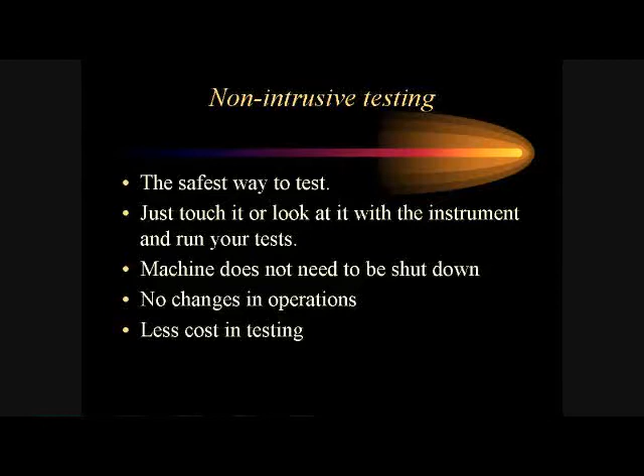Okay, non-intrusive testing is exactly what we're talking about. We don't have to touch it with ultrasound. We don't have to touch it with infrared because we can see it through the camera. It's all non-intrusive. We touch it or look at it with the instrument and record and run our test. We do not shut the machine down.

I usually set a base. I want the machine running under as near a minimum of 40% load as I can get it, because I want to test it in operating mode. I don't want it sitting there idling, because that's not the way it runs when it's operating.

Now, we talked yesterday about some variable speeds. CNC machines, for an example, you can't test those when they're in operation because of the noise of the cutting tools. So we run them empty, but we set every one of them at 1,200 RPMs. That's it. We know every test we run on a CNC machine is run at 1,200 RPMs. So now we have the trend. I can't come in here today and run it at 1200 and then come in tomorrow or next month and run it at 2200. We're not comparing apples to apples. Apples to applesauce, but it's not the same thing. So you can't do that.

So, okay, and also it's safer and there's less cost in non-intrusive testing. I have used ultrasound on every one of these applications. And there's probably not very many people in here - there's some of these you haven't even thought about, I'm sure. But I've used ultrasound on every one of these applications at one point in time or another. And I'm not going to stand here and bore you with going through each one of them. Does anybody have any question about any one of them, about what we done or how we done it? Again, you just let your imagination go crazy. That's what you have to do. You have to think about, how can I make this work? Because if you think about it, you can make it work.

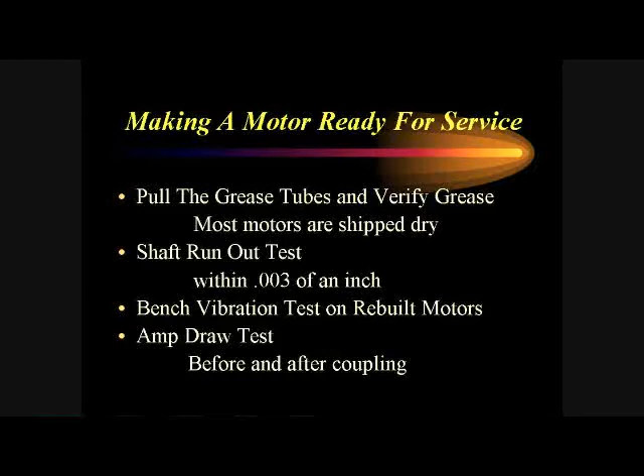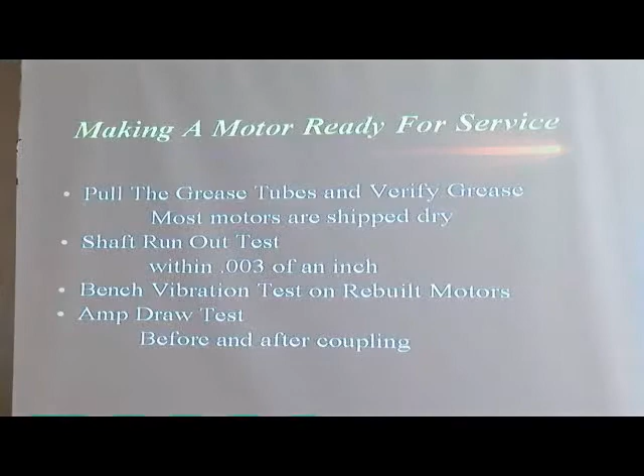Okay? So in order for us to start making some tests, in our application, we require some things of the business, okay? We have to make a motor ready for service. I can tell you right now, 80% of the motors that come out of the shop have dry bearings in them, okay? The first thing we have to do is pull the grease tubes. It's the pipe that runs down in front of the motor, down into the bearing. Invariably, a new motor or rebuilt motor, unless you've made arrangements, that pipe is going to be empty because they do not grease the motors coming out. The reason they don't is because moly-based grease and poly-based grease are not compatible. You mix the two together, they form an acid that will eat the races out of your bearings in 3 to 5 years. Well, they're not going to tell you that. And they don't know what kind of grease you're using, so they don't put anything in there. So now you get your motor, you set it up, hook it up, operating, we're off and running with dry bearings. Before you realize that problem, then we go and grease them, and it's too late.

Now, the book says we give it 2 or 3 strokes every 3 or 4 months. So by the time you get that grease tube full and actually get grease to the bearing at 2 or 3 strokes every 3 or 4 months, you're 3-5 years down the road and your bearings are already shot. Okay, so now I get to sell you a new motor. Built-in job security. It happens.

Okay, we insist on a shaft run-out test. A shaft run-out test, for those that don't understand, what we do is we put a magnetic stand on the motor or down on the base, take a dial indicator and put it on the shaft. Start at the keyway, turn it over real slow till we get to the other side of the keyway. If that dial indicator moves more than 3/1000ths of an inch, I send the motor back. I will not accept that motor.

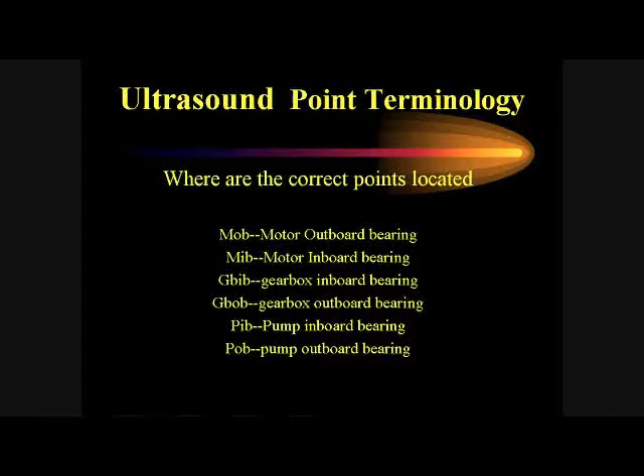And you'll notice on here we have MOB. This is actually what I put in the gun on the route. We have MOB as motor outboard bearing, MIB as motor inboard. It's pretty simple, pretty cut and dried. The gearbox inboard, gearbox outboard, pump inboard, pump outboard.

Okay, how would that look? Well, if I can find it... there it is.

Okay, you can see there the motor. We always start at the fan end of the motor and we go as the power flows. That's the easiest way to remember it. So if I start at the fan end of the motor, which is here, that's the motor outboard bearing. Obviously then this is the motor inboard bearing. Pump inboard bearing, pump outboard bearing.

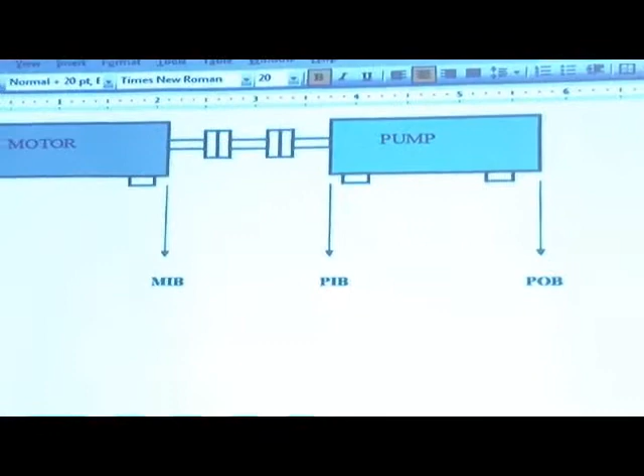On a horizontal pump, your two inboard bearings are going to be together. The two outboard bearings are going to be apart. In, out. It's not that hard. So now any one of you call me and say, I've got a motor inboard bearing that's making some noise, I know exactly which bearing you're talking about. We're not going to lose it in what we can mix up.

So let's look at one then that's - let's look at a gearbox. I'll try to get it up here if I can get... Windows 7 was not my idea, okay?

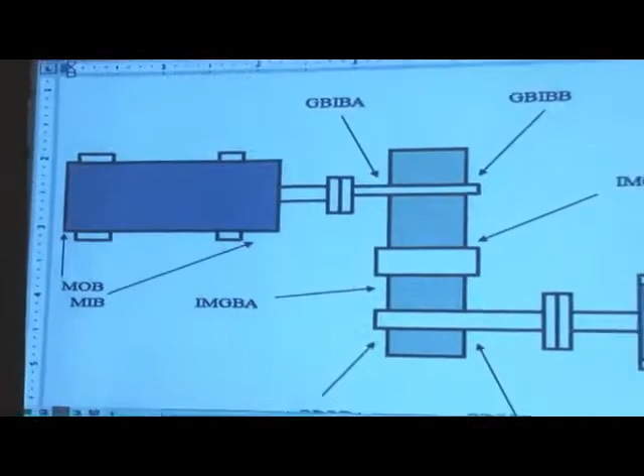Okay, so what we've done here, we've still got the same points that we had: motor out, motor in, pump out. But what we've done is put a gearbox in it, in that line. Now, the inboard side of the gearbox is always the A side. The outboard side of the gearbox is the B side.

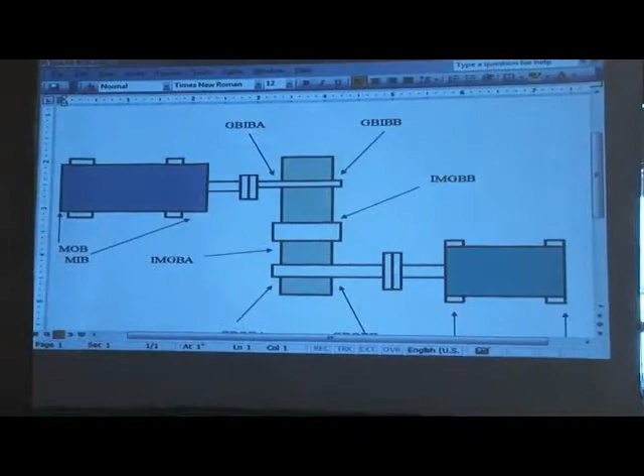So I have a gearbox inboard A, B, and C. Gearbox outboard A, B, and C. Okay, then we go into the machine. It's pretty simple, pretty cut and dried.

When we use - if we can get everybody using the same technology, whether this is the best or not, I don't know. It works the best for me. It works the best for our staff. I have 3 techs out in the field, and when they call me and say, Chuck, CM8 motor inboard bearing is making a lot of noise, I know exactly where he's at because there's no question, and we're going to look at that bearing before we're done.

Okay, if that applies on horizontal pumps, what do we do about a vertical pump? Okay, the vertical pump, everything's down in the ground. And it may be 20 feet down, it may be 5 feet down, it may be 200 feet down.

So what we have there is we have a motor outboard bearing. Remember, we're talking about the fan first as the power flows through the machine. So we have a motor outboard bearing, a motor inboard bearing. The pump, we just have to take a reading with ultrasound on the pump because it's going to tell you one of 2 things. And we're going to listen to that on a vertical pump in a little bit, and I don't want to give it away. So let's take these off.

So now we've got our terminology where we know - if I start talking about a certain bearing or motor or point on a machine, we're all going to know what it is. So now when I make up my route for ultrasound, I'll have CM9 as my heading, with the points underneath it. I can tell you right now, if it's a 2-shaft gearbox, the machine's going to have 8 points. If it's a horizontal pump with no gearbox, a direct shaft coupling, it's 4 points. I know that, so now I can make my route up like that.

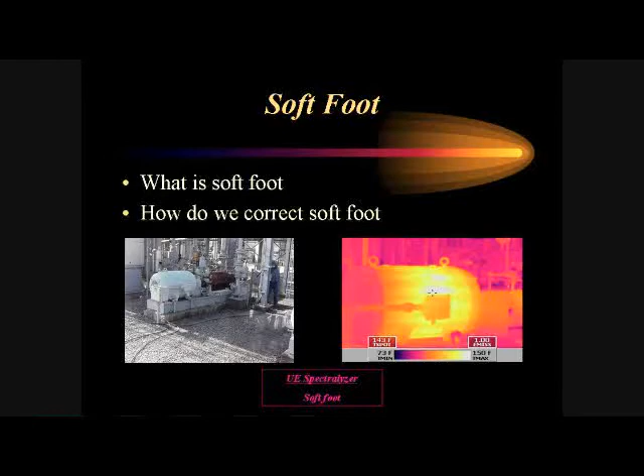See the hot spot on the motor? Right here's the hot spot in the center of the motor. The problem with this is a 300 horsepower motor, $22,000, and they put a twist in the case. The rotor tolerances in the center of that motor are so tight that when they twist the case, it shortens that down and it gets hot in the center. This is not out on our bearings - it's in the motor.

Now, what happened is we found that foot right there on the motor had a 10 thousandths soft foot. When we loosened that bolt, the motor came up 10 thousandths on that foot. So actually what they'd done was bolt 3 down, then bolt that one down - they forced a 10 thousandths twist. 10 thousandths is not very much at all. I have some business cards laid up here - I had these mic'd, these are 6 thousandths of an inch thick. So now you can kind of imagine what 10 thousandths is. It's not very much. But what happens?

What happens when we have a 10 thousandth soft foot? Where you at, Chuck?

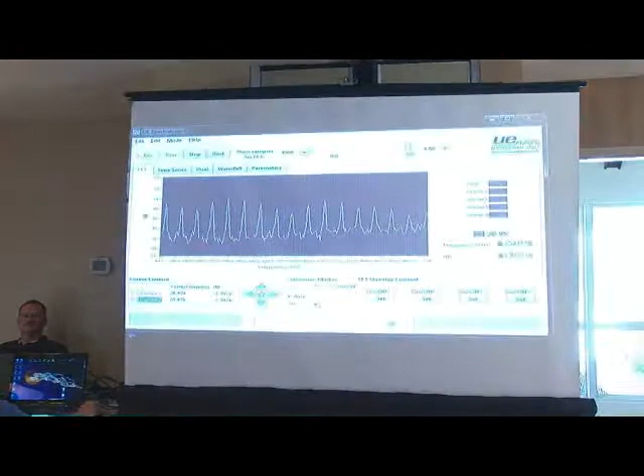Okay, what we're going to play is that soft foot. I want you to listen for the surge - you're going to hear the surge. Okay, are we ready? Here we go.

You hear that in there? That is that rotor working through a twist. Also, if we look, we have our 60 cycles in here - that's electricity, 60 cycles. It's electricity, it's just that simple.

At what point are you testing or using the UE where I can get that sound? To get this, right there on the motor inboard bearing. Can you repeat the question so they can hear? He asked me at what point was I checking the motor with the ultrasound gun - I had it placed on the motor inboard bearing, right above that foot.

Was it before the infrared or after the infrared? The infrared is how I actually found the soft foot. What was the RPM or turning speed on the motor? That one turns 1735, 1750. That would be a 2 times right there, which will also indicate soft foot.

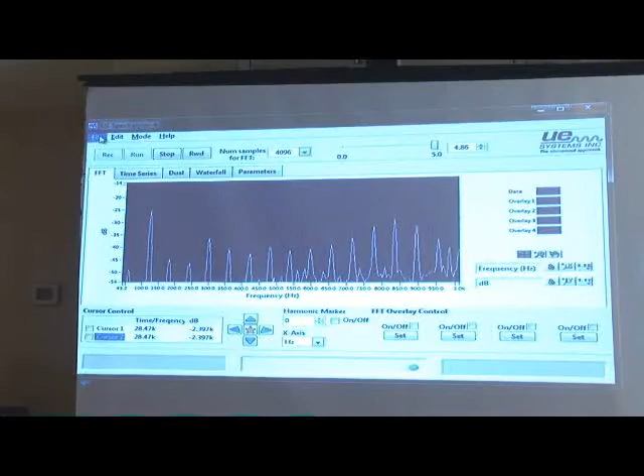We're going to open the wave. I got to stop it. Spectralyzer was not my idea either, guys.

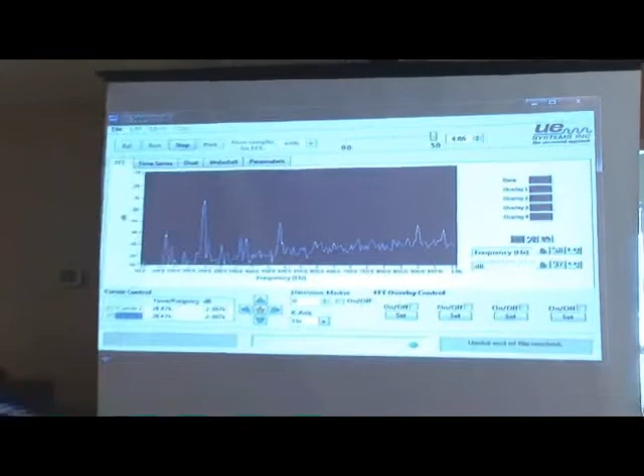Okay, so now we're going to correct the soft foot. Listen to the difference in the sound. The surge is gone, okay? That was a matter of about 20 minutes. We found that. We started checking the feet and found 10 thousandths. We put 10 thousandths under it, bolted it back down, and that's the sound we got now. So soft foot, very, very important. That should always be checked.

Always check. Yes, if I can find it. Stop. The first one.

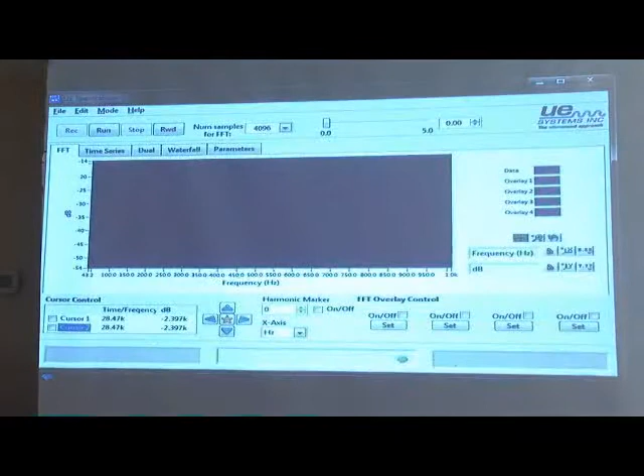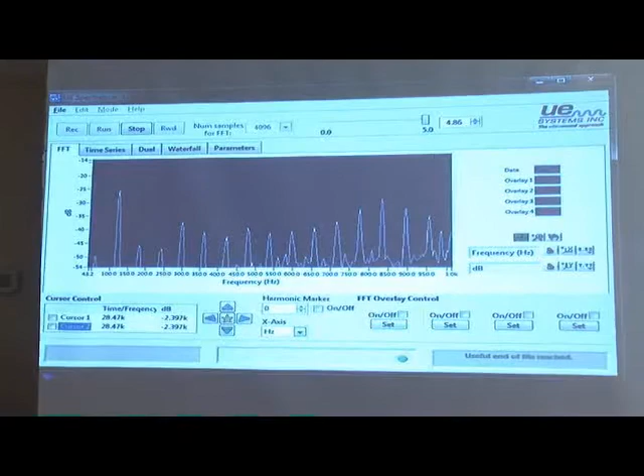Hear the surge in there? If you would have listened to the outboard, would you have seen it? I think you might have. I didn't, but I think probably you would, because that's going to be throughout the motor, since it's coming off of the rotor. You look at the amplitude, it's in harmonics. When you look at the one after you fix the soft foot, it's not in harmonics. It's gone, the soft foot's gone. So it's turning, you're getting into the 60 cycles. What we're getting into is the electricity of the rotor rubbing on the outside of the case. Okay, so let's move away from this one.

One more question. Is there any specific frequency you can refer to detect this soft foot? What frequency do you have? Oh, frequency? Yeah, it's 20. I test all my contact bearings at 25 thousandths. So that's where I was at on there. It was 25 thousandths. 25 hertz. Kilohertz. 25,000 hertz. That's where I got 25,000. Okay, let's move to the next one.

If I can find it. See, all this technology, and I got stuff laying everywhere, and I lose about half of it. So I got to get back on that screen.

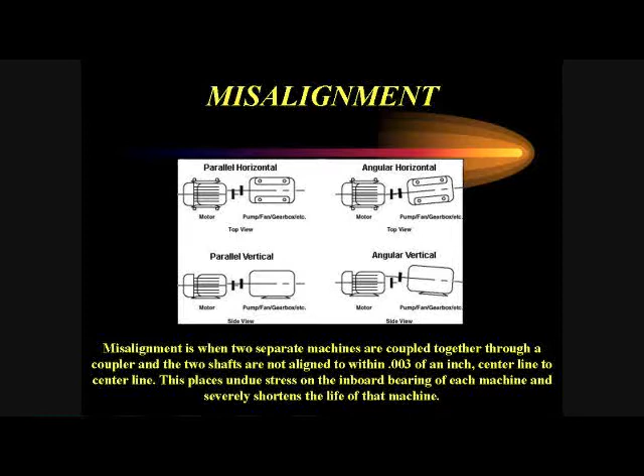Here's misalignment. You see what's happening here, and a lot of people don't understand it and don't realize how important it is until we see something like this. These machines are not going to last very long. Because how many of you have tried to open a gate when the hinge is crooked? The gate's hard to open because it's bent. That's what we're doing with the motor. We're trying to open that gate, but we're doing it at 1700 RPMs.

And then we wonder why it shakes. Okay? Misalignment. Very, very important.

This is the old way to realign them. It's called reverse dial alignment. The bottom one is tied to this shaft, and it's got a dial indicator on the other shaft. The top one is tied to this shaft and has a dial indicator on the other. So when you roll it over, it's measuring this. You want those to be at 0.

This is the cheapest way of going. It's not as fast as lasers. Lasers are a lot better. I do everything now with lasers. We'll have some examples of that here in just a little bit.

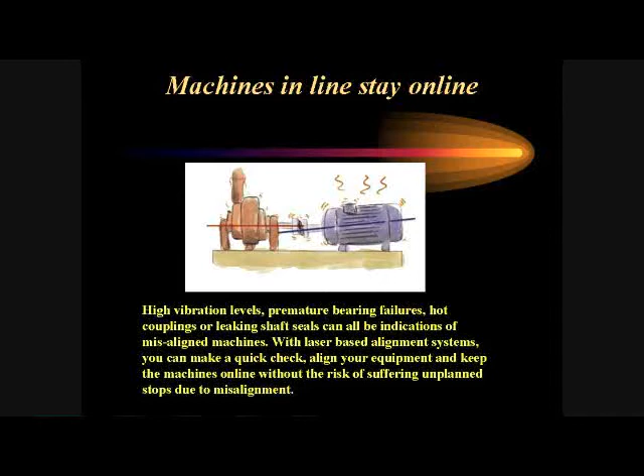Okay, here we go again. High vibration levels. Now, let's think about this. Ultrasound tells me my 2 inboard bearings are louder than my 2 outboard. Infrared tells me my 2 inboard bearings are hotter than my 2 outboard bearings. I put my hand on the motor, and it feels like a vibrator. I got 3 things telling me here that this thing's misaligned.

At some point in time, we need to make a decision to fix the machine, or the machine's going to make a decision. And they don't have any conscience. They don't care. I guarantee you it's going to go down at 2 o'clock in the morning when there's no staff here. We got to call all the staff back. 4 inches of snow on the ground and 50-mile-an-hour winds, except in Brazil. They don't have that. Okay?

But you understand what I'm saying. Nobody ever lost a motor when they didn't need it. If you don't need it, it ain't running. So we always lose them when we're working them the most, pushing them the hardest because of production. That's when logically, that's when they're going to fail.

So now what we have is we're hurrying. We're taking shortcuts. We're trying to get back up and running because we're losing production, and management's out here on your backside trying to get you going. And now it becomes unsafe. Now we start to lose fingers because we're not doing things the right way. We're taking shortcuts. We don't do near as good a job of alignment because we're in too big a hurry to get it back to running.

I say we take the time. Let's do it right to start with. Then we don't have to double the time because we're going to end up doing it again.

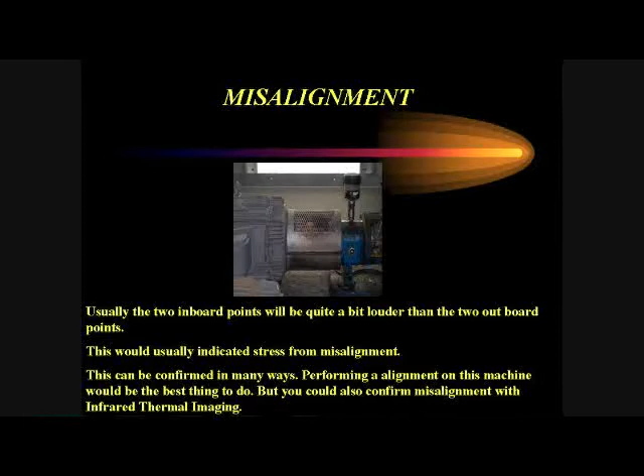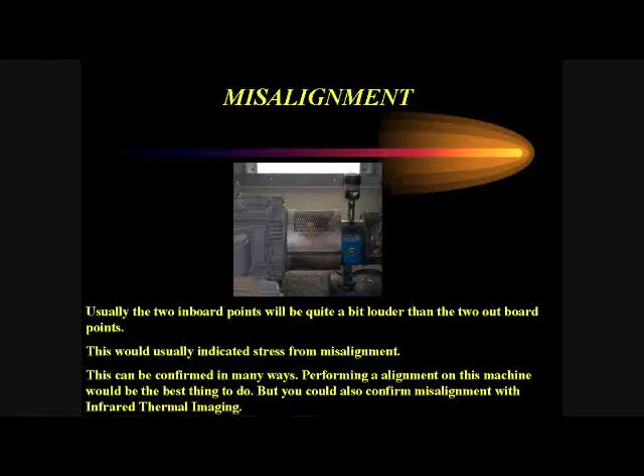I have a couple examples of this, so we'll look at another one here right quick.

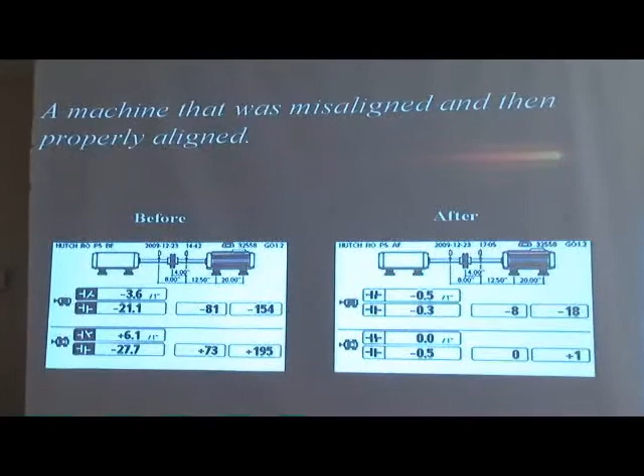So when we got done aligning it, this is the way it's set. That 5/10 is 5/10 of 1,000th. That's how close you can bring them. I literally could take a glass of water and set it up on top of that motor, and you don't even see a ripple in the water when it's running. You have to put your hand down there to see if there's air blowing to even know it's running. They run that quiet when they're aligned right.

Okay, let's look at another one.

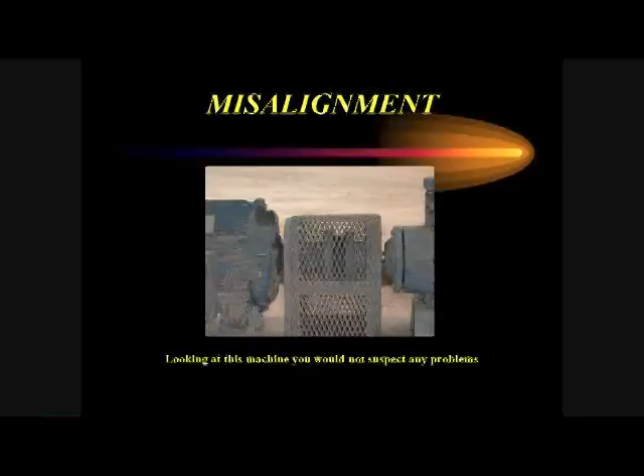This one here is a Martin-style coupler. We've all seen the Martin-style couplers. It's the coupler that goes together, and it's got the rubber in the center of it that looks like a gear. And that's what makes it turn, okay?

So this coupler was so far out of alignment - we've all taken a piece of wire before and bent it until it broke and it got hot. That's what's happening here. These two hubs are doing this, so far out of alignment the motor's about to jump off of the base. So again, the two inboard bearings were louder than the two outboard.

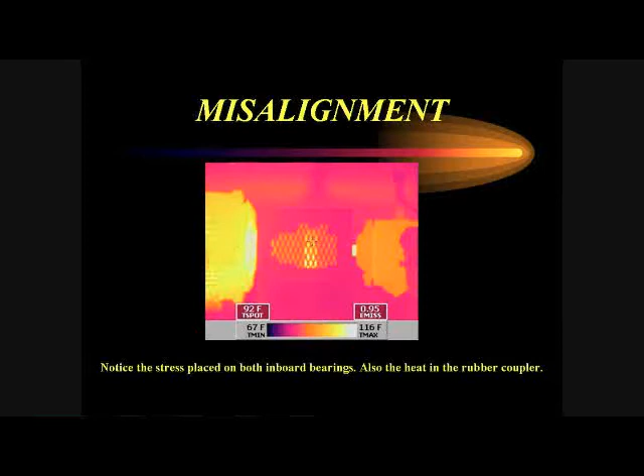So we look at it with infrared, and it's pretty obvious. Look at that coupler. There's no reason for that piece of rubber in the center of that to be hot other than misalignment. That's all it can be. There's nothing there to heat that rubber up. But you can see the bearings on the pump and the bearing on the motor are both hot. Classic case of misalignment again.

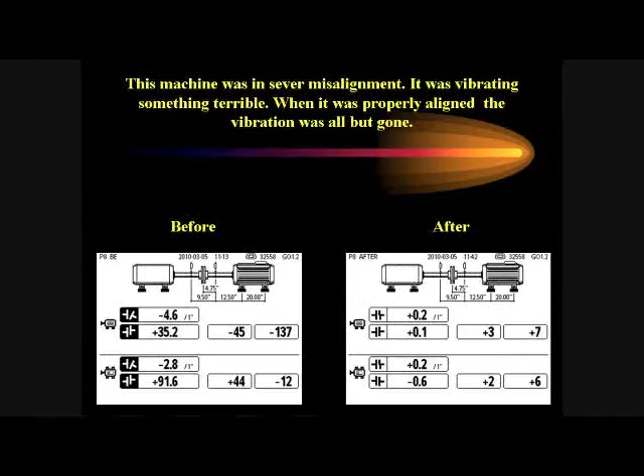So we realigned this one, and here's where we go. It was 91 thousandths out. See the difference in how it came back in once we put the lasers on it. You put the lasers on it, it's about a 45-minute job to align it and get it right.

Now, 45 minutes to get it right and make it run 10 years, or don't take 45 minutes and get it wrong and have it run 18 months. Doesn't take a rocket scientist for me to figure that one out. If I can keep from doing it every 18 months and do it once every 10 years, that's the way I want to go. I'm lazy by nature.

So misalignment is very, very important. It's things that we have to really think about, and we're using our technology to find those problems. Didn't used to be that way. Used to be you put your hand on it and say, it's not bad, or you put your hand on the pump, it ain't bad. That human thermometer thing's not a good deal.

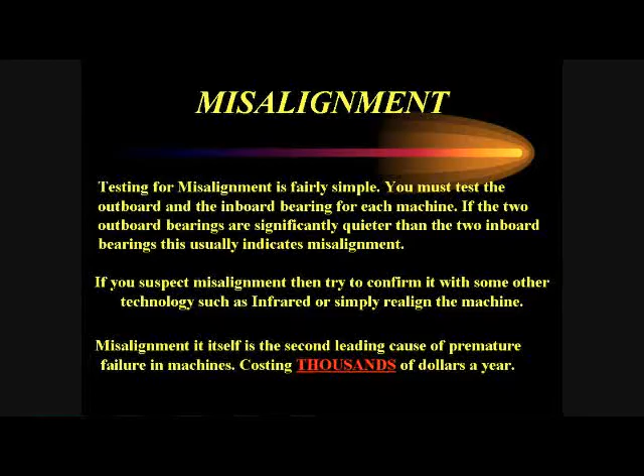It's not a good deal because, again, now we're breaking that plane. And sometimes you put a hand in there and you pull part of a hand back. That's not a good deal. We don't want to go there. So misalignment, we have to pay a lot of attention to that.

Okay, here's a simple question. If misalignment is the number 2 cause of premature motor failure, what is number 1? Lubrication - close. Improper lubrication.

How much grease is enough? How often do we grease? The book says we give it 2 or 3 squirts every 3 months.

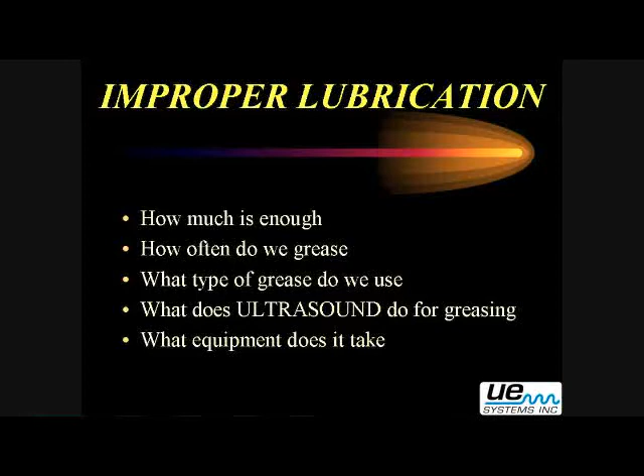Well, what I'm saying here is Mark is a motor and he runs 24/7. Bennett's a motor right here and he's kind of lazy, he only works 2 hours a week. We're going to grease them both the same? It's not even logical. It doesn't make sense.

We're going to undergrease this machine, and this one's going to be deadly overgreased if we do what the book says. So I say throw the book away. Get rid of it, we don't need it. Start using ultrasound. Use the equipment we have to do it. I grease bearings with ultrasound totally.

And a lot of our clients, they do not grease motors. My staff does it. We have taken over their grease program completely, because there are some things that we require. We talked about it on the motors a while ago. How often do we grease?

What type of grease do we use? How many of you are using all-purpose grease in your plants? Boy, am I glad to see that. You know what? All-purpose grease, Mystic JT6, that red stringy stuff, that's made for a plow out on the farm.

We need to be in a Polyrex SHC 100, something like that, that's a high-speed grease, a high-temperature grease that's made for electric motors. We can't use the same thing that we use out on the farm and just pump grease in it till it oozes out, because that's what we used to do, and we've been raised to do that.

When we do that, all we're doing is pumping the dirt out of the bearing. We're not re-lubricating it - it's got enough lubrication in it. But if we pump grease till it oozes out, then we're forcing the dirt out of the bearing. That's all we're doing. We've over-lubricated it.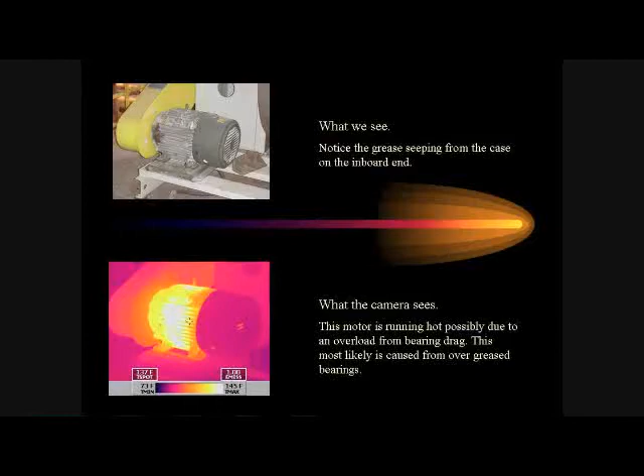So let's move to a bearing then. What happens here? If you look at this motor, right there, you see grease coming out of it, right here. The problem with that is it's been overgreased.

What happens when we overgrease a motor? We have any electricians in here? Good, then I'm not going to get in an argument.

Contrary to popular belief, electricity doesn't go through the wire. It goes around the wire, around the outside of it. That's how we measure how much current is going, because we put an amp probe around the wire and measure the magnetic field. The bigger the wire, the more surface area you have, the more current you can run through it, and it stays cool. The smaller the wire, the less current.

Also, contrary to popular belief, insulation is not to keep you from getting shocked. It's put on there to direct the flow of current, to make sure it's going the right direction.

So now, if we overgrease our motors, what happens is the grease builds a tunnel. It starts working to the outside. As the balls are going around, it builds a tunnel in that bearing. So now the balls in that bearing are running in this tunnel.

It can't dissipate the heat. It can't get it out of there. It becomes an insulator. So pretty soon it gets hot enough to melt the base down of your grease, and then your oil starts to sling to the outside, and we start to get leaks around our motors.

And everybody here's got one of these. And if you don't, if you say you don't, we'll go find you one. Because everybody does this.

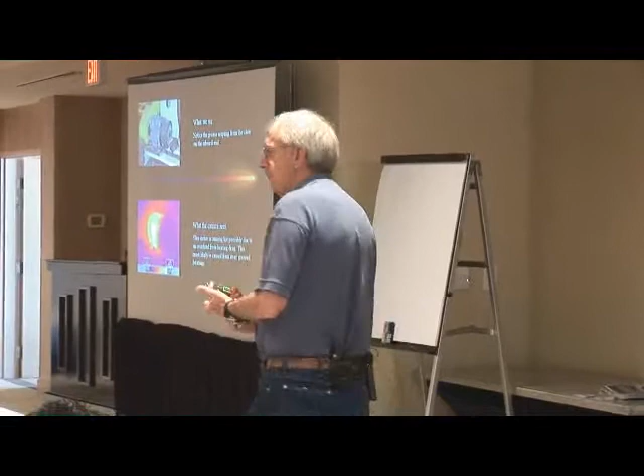So now that it's hot, it's starting to lose power. We're losing RPMs. It's not carrying the load it did. What's the first thing we do? Pump some more grease in it.

Invariably, that's what happens. The first thing, oh, it's getting hot, let's grease it. Well, the reason it's getting hot is because it can't get any air. I asked the guy, I said, how much grease do you put in it?

He said, well, it's a 25 horsepower motor. I said, okay, how much grease do you put in it? He said, I told you it's a 25 horsepower motor.

We all got these. Same scenario. It's leaking out. It's coming around the end bell. It's being slung to the outside, centrifugal force.

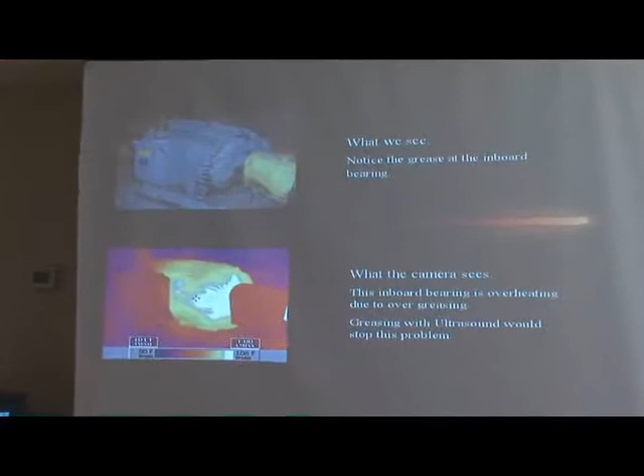25 horsepower motor, how much grease do you put in it? He said, well, it's a 25 horsepower motor. I said, so what? He said, you don't understand. 25 horsepower, you put 25 strokes in it.

What do you do with a 600 horsepower motor? Pump a 55-gallon drum in there? Now, y'all think I'm kidding you.

Here's that 25 horsepower motor. Look at that. That's unreasonable. Look at the grease. No wonder the motor's getting hot. This happens every day.

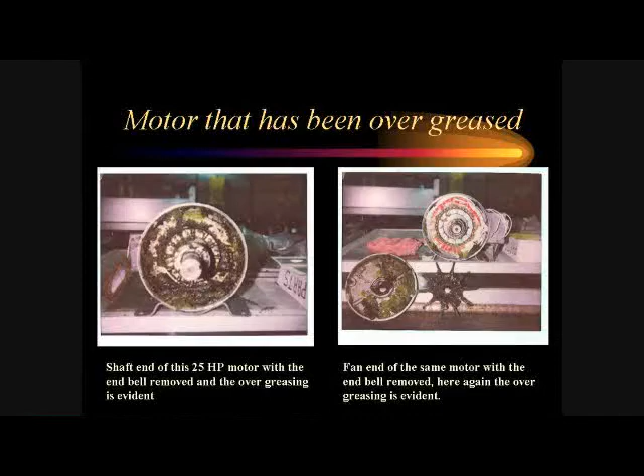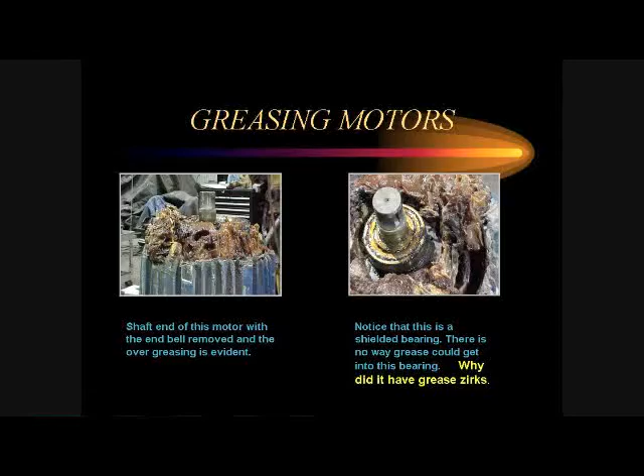Every day. I found this one in Wichita, Kansas, about 40 miles from where I live. Look at this. Oh man, I'm telling you what. After about the 8th tube of grease, the light should have come on. Where's this stuff going, you know?

Number one, this guy would not be working for me anymore. If you ain't smart enough to figure out 6 or 8 tubes of grease is enough in this motor, then I don't want you working here.

The other thing, notice the bearing. Look at that bearing. It's a shielded bearing. You couldn't get grease in it if you wanted to. So why does it have grease zerks in it?

Well, the maintenance man in his infinite wisdom goes out and looks at the motor, hears it rattling a little bit and says, boy, that needs some grease. So he pulled the plug out and put a grease zerk in it so he could put grease in his motor. So they pump grease and they pump grease and they pump grease, and it never quieted down, and they keep pumping grease till finally it's messed up. It's gone.

In my clients, I will not have a motor with shielded bearings in it. The reason for shielded bearings is to keep you from overgreasing, because that's what happens. Now, in my situation where I have to have the plant running 24/7, I want to be able to, at least if I find a bad one, I'll put some grease in it and I'll baby it along until I can get to a scheduled shutdown.

If it's got shielded bearings in it, I'm at the mercy of that bearing. There's nothing I can do. I just have to hope it lasts until we can get to a shutdown. So I will not have shielded bearings in any of my motors. The first clue of a shielded bearing is they pull the grease zerk out and put a pipe plug in there. If I get one back like that, it goes back to the factory. I don't want it. We're not going to have it in my plant. And that's very, very important, especially when you're in charge of greasing all the motors.

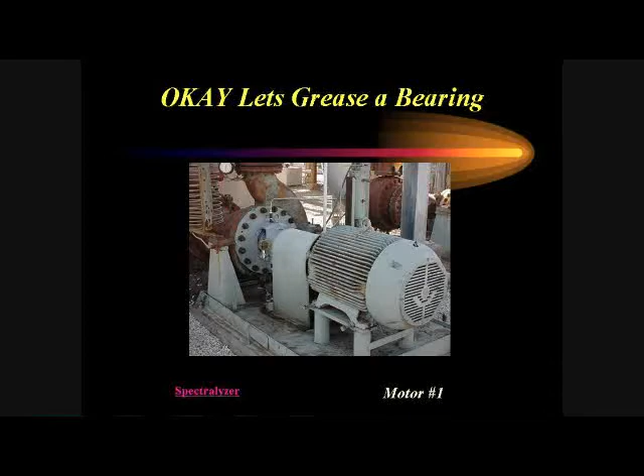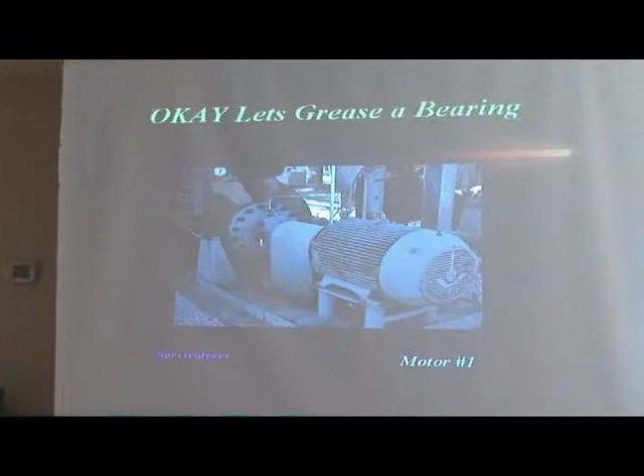I've got plants that have 500 motors in them, and we grease those motors, but only when we need to. We throw the book away. We're not going to grease every three months just because it says to. So let's grease a motor. This is a 200 horsepower motor that's been sitting on this stand for probably 15 years. It's a deethanizer bottoms pump. This pump pumps 1,500 pounds of pressure, and it's boiling propane. What happens is it pumps...

Yes? She has a question. The microphone? Oh, here, I got it. There we go.

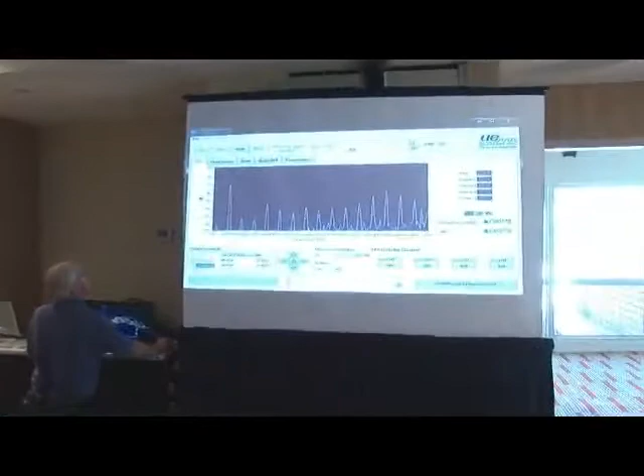Very good question. So let's grease this motor. What we're going to do is I'm going to pull this back over onto the screen. We'll go to File. I better go to Stop. Hey. Hey, Gary, you see what's going on here, don't you? Okay.

Okay, we're going to grease that. We're going to listen to the motor first. And when we listen to this motor, a good bearing should sound like air escaping. That's the way it should sound. It shouldn't sound like popcorn, it shouldn't sound like marbles in a bucket. So let's listen to this bearing.

Okay, you can hear the crackle in there. That motor needs greased. When you hear that crackle, it's dry. What's actually happening is you're hearing the grease that's in there separate, that's what's making the pops. So let's grease this motor. We're going to listen to it. As we grease it, listen for the change. Listen for the change, that's the main thing. Okay, so let's stop.

It takes an old dog a while, but he'll learn the trick after a while.

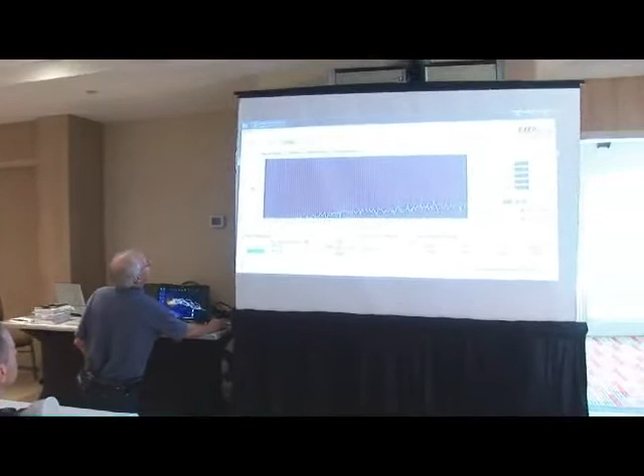So what you're saying is this - I think further to what Hugo is asking - an over-greased bearing can be misinterpreted as a good bearing. Yes, it can. But you have to use the other thing, like a doctor, you actually look for the symptoms, and if the symptoms does not seem to point towards it, then it's not. That's right. Thank you. Okay, it's just an indicator.

Mike. Another thing on the over-lubrication, and I'm sure a lot of our UE guys can talk about this, is that a lot of times you'll hear an over-lubricated bearing and it just sounds a lot like cavitation, with that popping sound. So what you can also do is grease that bearing, and if that total quality doesn't change, your decibels don't change, it doesn't see that drop, that's another indication to say that bearing is already over-greased. So there's your other indication along with it.

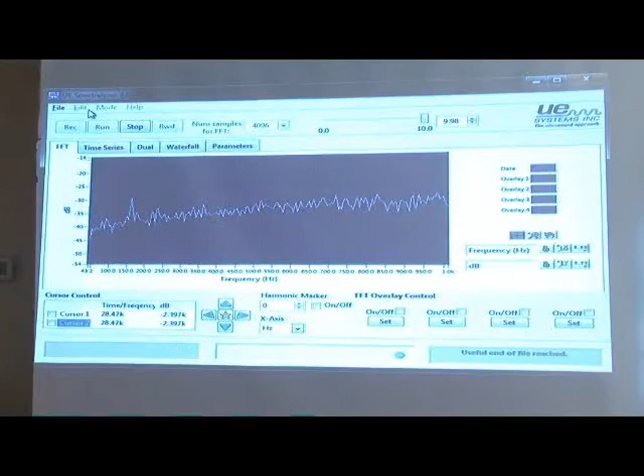That's on a 600 horsepower motor. It's CM8. It actually is on a gearbox that runs a compressor that turns 13,800 RPMs, so it's a very, very important motor. So we greased it. Now when we grease this one, I want you to listen to the end because my tech didn't do a real good job of recording and catching it at the right time. But listen to the end, okay?

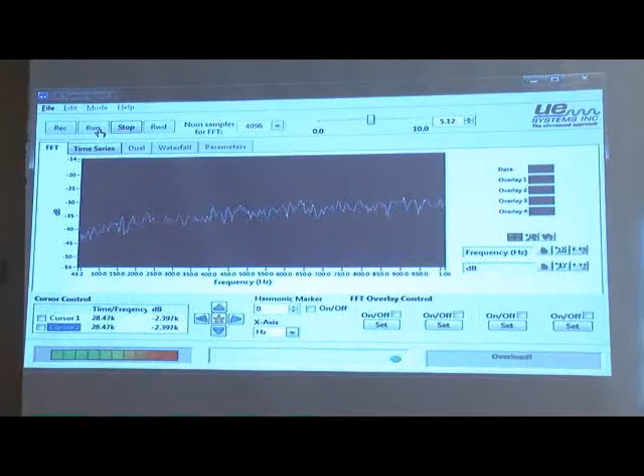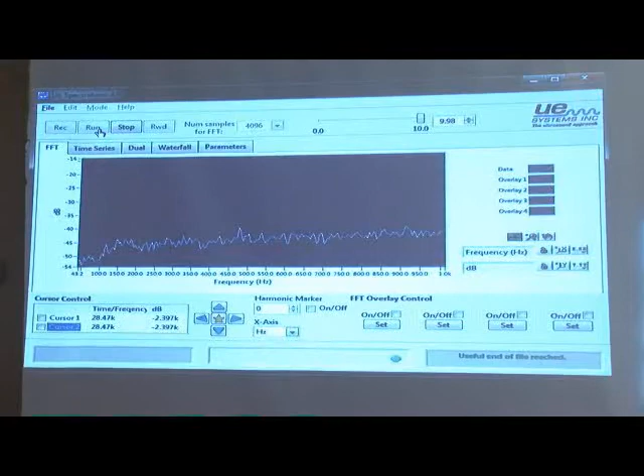Okay, right at the end we could hear it dropping down, hear it getting quieter. But did you hear the crackle that's still in it? What we determined there, we went ahead and took this machine down. What we determined there, it had not been greased in so long that the grease had dried out. So when we pump grease in there, we were getting good grease in, and then every once in a while we'd get some dirty grease or some dried grease, and it would crackle in the bearing until we finally pumped through and got it all sounding clean. So you can even tell from there that you're getting good grease to it or not by listening to what it says, okay? So, yes, another question.

Go right ahead, I can hear you.

So they don't have infrared, just ultrasound. If you listen to it, the bearing's crackling. They pump a little grease into it, and if it doesn't smooth out, write it up, get it changed. That's simple, it's just a bad bearing.

Now we can look at the bad bearing, we'll do that here in just a little bit. We'll show you. Okay, so we've greased this motor. Let me find my stuff.

I'm going to pop this up. This is the second motor we listened to, a 600 horsepower motor. This is what a motor should look like in infrared.

Look at the center of the motor, it has a band on it. You see the band right here on that motor? It's warmer right there. Anytime a bearing on either end of the motor, inboard or outboard, is hotter than the center of the motor, we have a bearing problem.

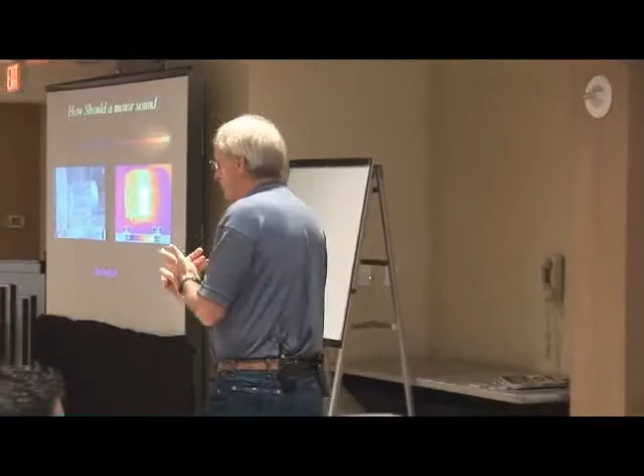So there's no reason for them to be hotter than the center of that operational part of the motor, unless there's a problem. That problem may be a dry bearing, may be misalignment, or we may have the belts too tight and pulled over into the race on that backside. We don't know what the problem is, but we know we have a problem. So now we start watching this, and if we see heat building up in the bearings, we need to take care of it.

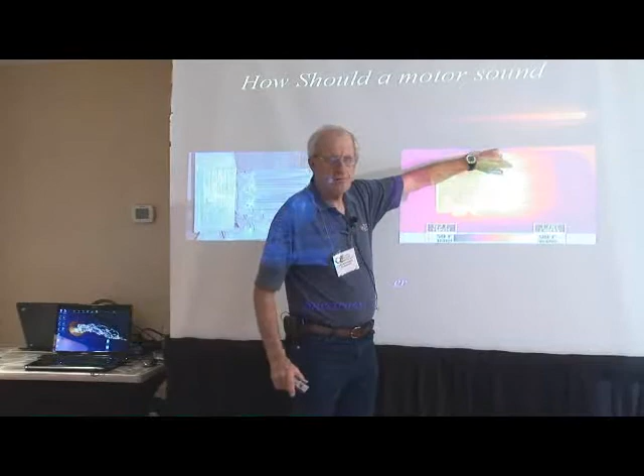Yes? On this motor that's warmer in the center, earlier the motor we looked at had a hot spot in the center -- misaligned. How do you determine the difference? The soft foot will be a spot, this is more a band, the whole thing here. You'll have a spot where it's rubbing, but this is the band -- this is the tolerances in the motor. And this motor runs 24/7 also, so it builds heat in it.

Okay, let's move on, this is real quick, I want to go through this. The bearing that we're going to look at is a bad bearing, a known bad bearing. This stuff is available to you. Gary and I worked this out, and it's a very simple thing to figure out what's wrong with your bearing or how your bearing is failing.

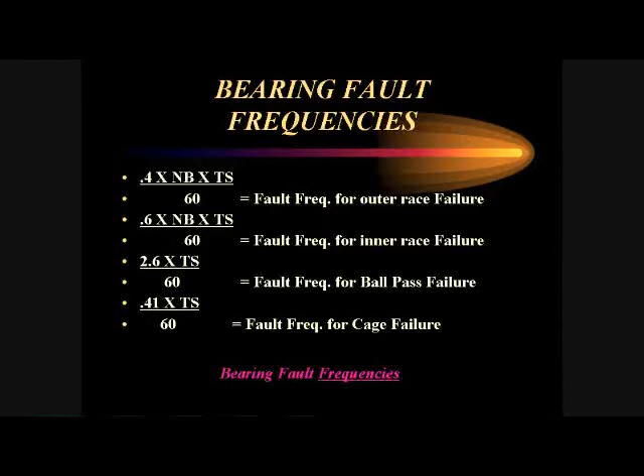If we look at the top one, we can see that if we take 0.4 times the number of balls in the bearing times the turning speed, then divide by 60, whatever that number is will be the fault frequency on Spectralyzer for the outer race failure. So now we're beginning to see that we can tell what part of the bearing is failing by using this. Okay, so let's listen to a bad bearing right quick.

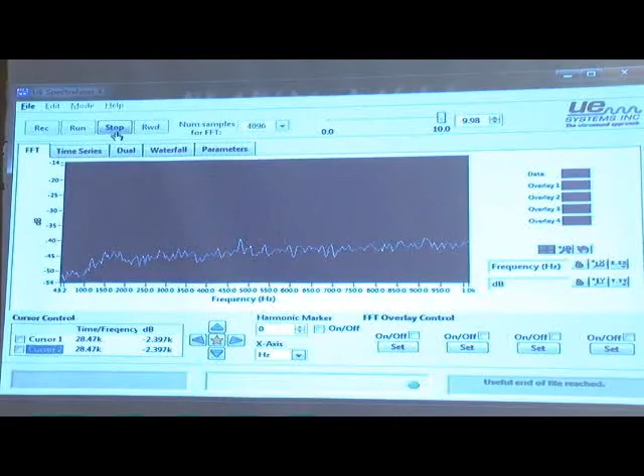Gary, we got to change this. Okay, here's a bad bearing, this is a known bad bearing.

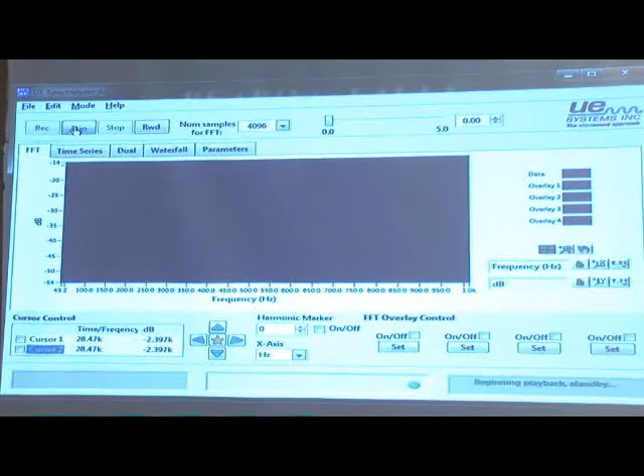You hear the tonal sound in that bearing? A bassy sound -- certainly doesn't sound like air escaping. What that bassy sound is, is that ball coming around hitting that pit. It's doing it 1,700 times a minute, so you can't hear between them, that's why it sounds like a hum.

So if we take this -- and this one here I'll take credit for -- we want to put a harmonic cursor on there and find what it is. Used to be, how many of you are using Spectralyzer 4 now? Everybody should get it, it's free, it's on the website, it's simple to use. And there's many things it will tell you.

This one is awesome because I can go right here with my cursor, hit the shift key, and that gives me the fault frequency that I have in this bearing. You see the harmonics going across there? This one happens to hit right on 91. Now if I'm not exactly where I need to be, I can go right down here and toggle up and down. Used to be you had to move your mouse over and work real hard at it -- I'm a PC and this is my idea.

And it worked real well. It works great. I just happened to hit lucky enough to hit 91 here, to hit it right on every point. So what is 91? It's my bearing failure. Okay, so let's bring up the other little chart that we showed a while ago with the formula in it.

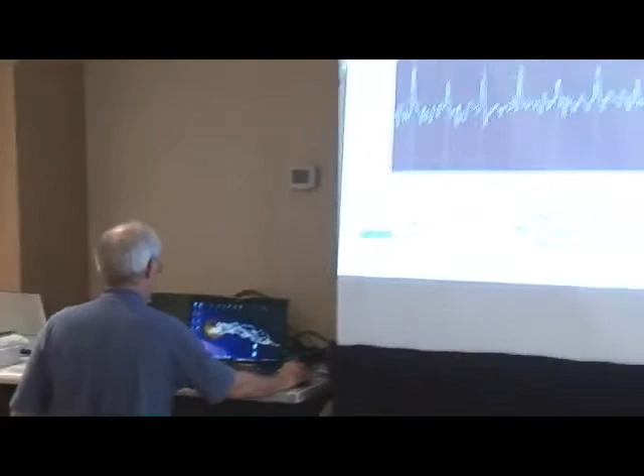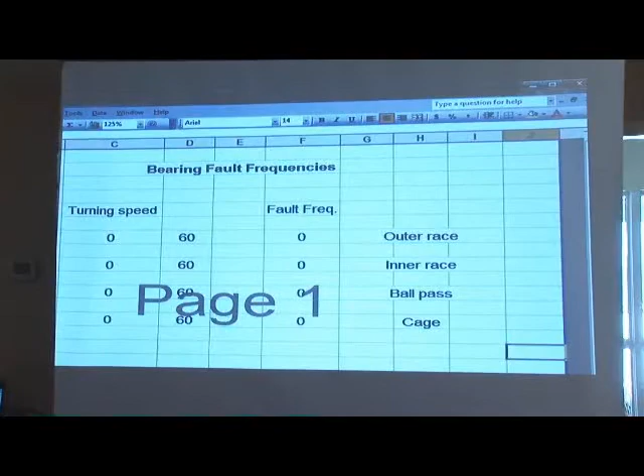I'm going to have to make that a little smaller. Okay, here's our formula: 0.4 times the number of balls. I know this is a 6313 bearing, it has 8 balls in it. So I'm going to put an 8 right there where the balls go.

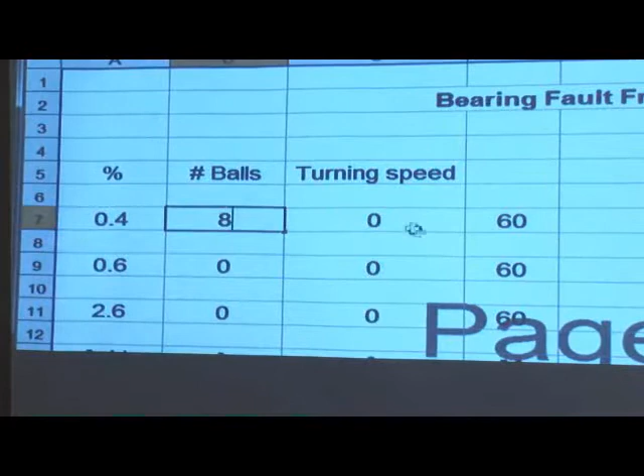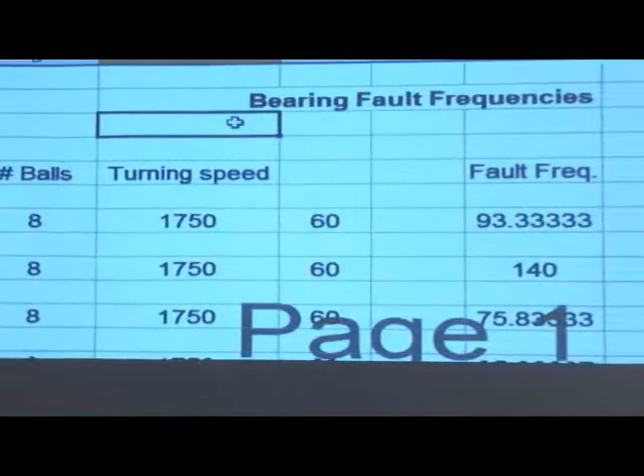The tag speed on the motor says 1750. So let me put 1750 in there as a turning speed. And you see what happens, magically it gives us our fault frequencies. At 1750, 8 balls in a 6313 bearing, the outer race failure fault frequency is 93.

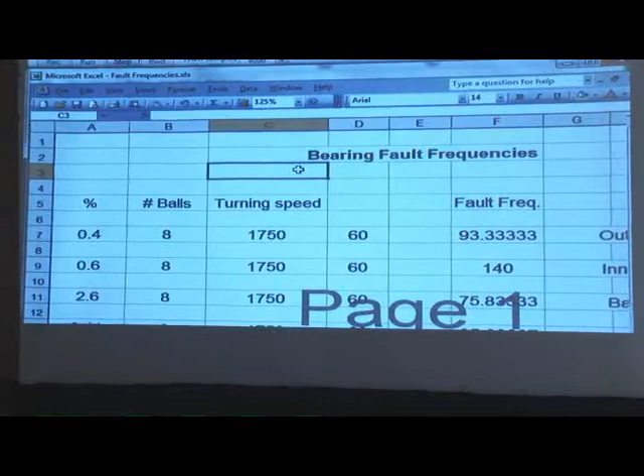But you see we also have the inner race, the ball pass, and the cage failure frequencies. Now what does this do? It don't mean squat, because I'm not replacing an outer race, I'm going to replace the whole bearing. But what it does tell me, if I have to do this 4 or 5 times and the outer race is the one that failed every time, what am I doing to this motor, or what's happening in this motor to cause that failure? So instead of just throwing bearings at the motor, let's fix the problem.

Now, what was our point a while ago on that spectrum analyzer? 91. Well, that's not right. So what's the other variable? There's only one variable here - we can't change the number of balls, speed is all we got. So let's drop this speed down to 1735.

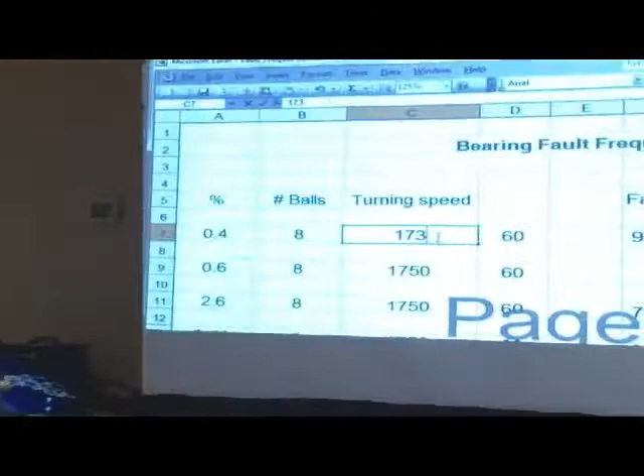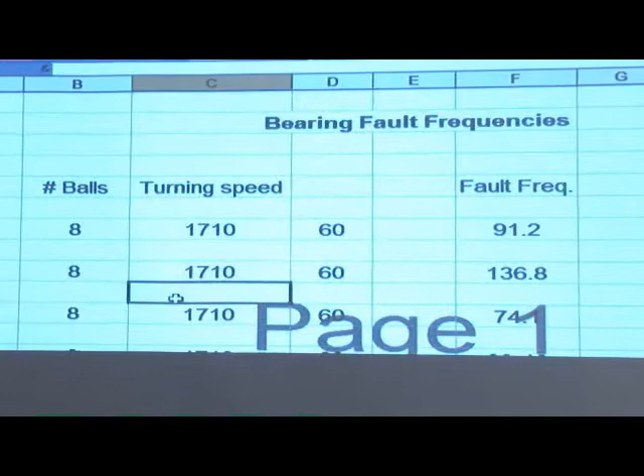Well, we're getting closer, huh? I happen to know this one because I've done this once before. So... bingo! Our motor is turning at 1710 RPMs. It's not turning at 1750 like the tag says. What I contend here is the bearing has got enough wear, and it's bad enough that it's putting it in a bind - it's slowed it down, the greasing problem.

And the other thing is it's running under load now. That 1750 that's on the tag is bench speed - no load, no coupler. No motor turns exactly what it says.

All right, so now that tells me I've got an outer race failure in that bearing, which in time we're gonna prove that that's the case. I got to hurry here, I'm running out. Doug's going.

Doug's going to cut my power off here shortly. I thought, I'm kind of confused. You got another 20 minutes. Yeah, I know, that's why I'm hurrying. Okay, the question? Hang on. No, because you mentioned the 1750, the nameplate speed - that's the one that's supposed to be running at full load, not when it's...

Okay, I made a mistake there then. But we see it's not doing that - that's the point, that's the whole thing. We're not running at the speed we're supposed to be running, because our harmonics has nailed it out. And that harmonic is that ball hitting that pit every time it goes around. So that's the only variable we have, is our speed.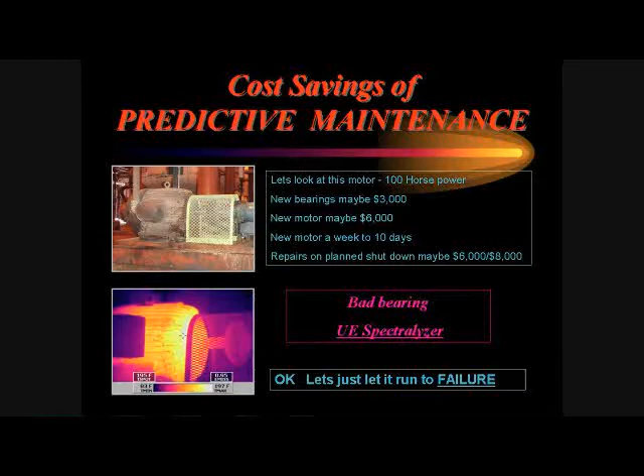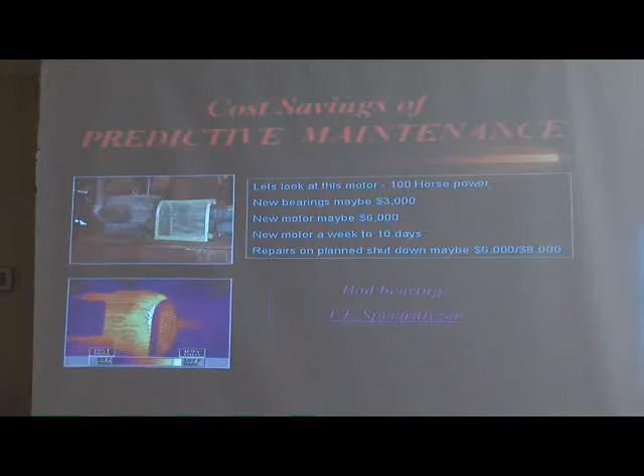100 horsepower motor, new bearings we can put in it - when I made this demonstration about 2-3 years ago, we could put them in for about $3,000. New bearings. A new motor maybe costs $6,000. Planned repairs, we could probably fix this for $6,000 to $8,000 on scheduled downtime. I tell the guy it's going to fail. He said, 'No, we can't shut it down. The plant makes $35,000 a day. There's no way we can shut this plant down.'

I said, 'Well, either you make the decision or the motor's going to.' He decided to shut it down. When he did shut it down, when it rolled to a stop, that was it - you couldn't turn it with a 4-foot pipe wrench. The only thing that kept it running was the fact that it was running. So let's let it run to failure. He said, 'We're not shutting down.' So okay, let it run to failure.

$35,000 a day his plant makes, and he can't get a new motor for 10 days. Right now we're $350,000 in the hole. Over time, plus other collateral damage, we might have twisted the impeller off when it locked up, so we could be talking a lot more money. This job could turn into $500,000. Now, any one of you that wants to, you go in and tell your boss, 'I'm sorry, boss, day before yesterday I could have fixed this for $8,000, but now it's going to cost you $500,000.' I don't care what kind of relations you've got with your boss, you won't be there very long. So that's exactly what we're talking about.

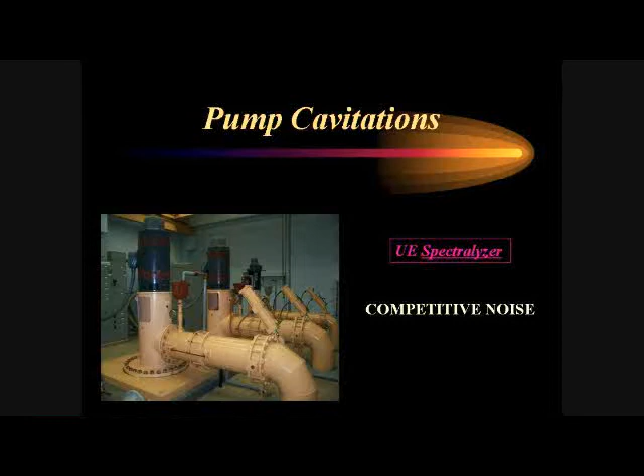Now, we brought up competitive noises, and you were asking earlier about down in the pump. Let's listen to this one real quick because it's pretty awesome. Okay, I got it this time, guys. Open the WAV file. We're going to listen to cavitation before it was fixed.

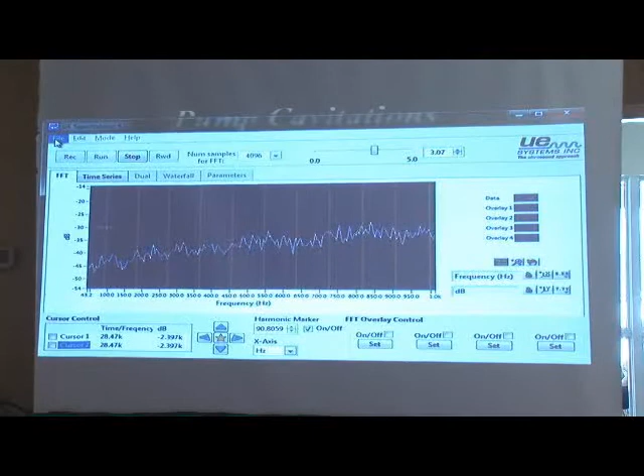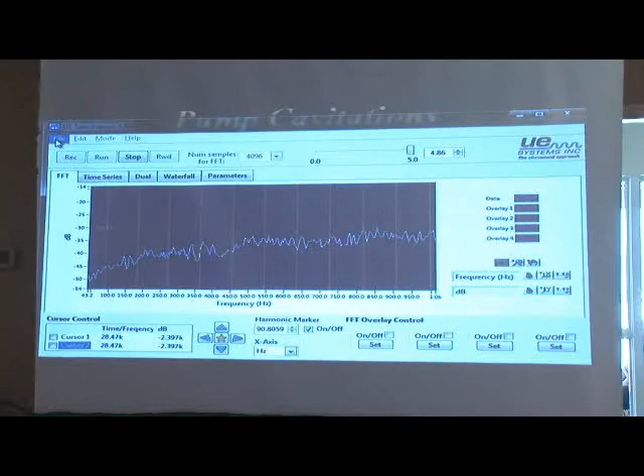That is ugly. But the thing we want to point out here, there's no rhythm to it. It's just like something shaking. There's no rhythm to cavitation. Now, what causes cavitation is we're trying to pull the liquid through the pump faster than it can come, so we get little vacuums, little bubbles in there that explode on the impeller, and that's what we're hearing.

How do we stop that? I'll tell you what I done. I took the discharge that much - actually, that much - on the discharge side of the pump. Listen to it now. Here we go.

That's all we done. So now they say, 'Well, I can't shut that down a quarter of a turn, I need all that production.' Well, what I'm saying is, run your pump at 90% to get 100% efficiency out of it, instead of running your pump at 100% and only getting 70% efficiency out of it. Okay? Cavitation.

Gate valve. A gate valve, yeah, it's just a discharge valve on the pump. So we have one more here that I want to show everybody right quick.

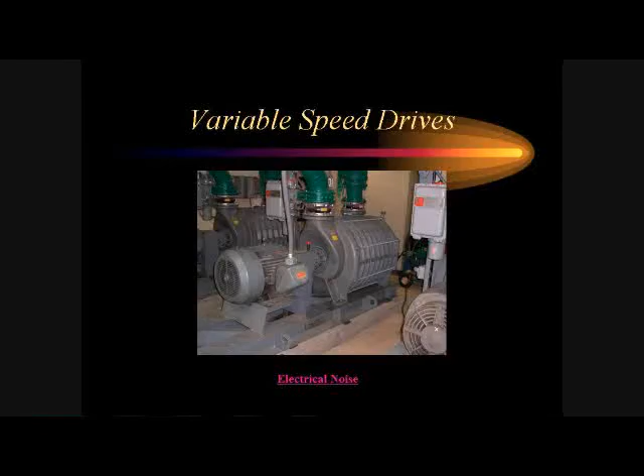This one just came up. Variable speed drives - how many have variable speed drives? I don't want to steal anything from James because he's going to talk about them in a little bit. What we've been finding in a lot of water treatment plants, pumps just like this one - this happens to be a digester blower - we're finding that the rotor is building a charge and discharging that charge, partial discharge, through the bearings. It will flute the races out of the bearings.

Now, how do we solve that problem? There's an easy fix. Number one, if you put your variable speed drives in right, you put a filter on the inside and a filter on the outside to stop that from happening. But if you go the cheap way, you're just taking a chance. In this case, they went the cheap way. This pump, when it was put in, was so far out of alignment the whole building was shaking. I told them, 'Guys, there's nothing we can do with this until you get rid of that vibration.' So what did we do?

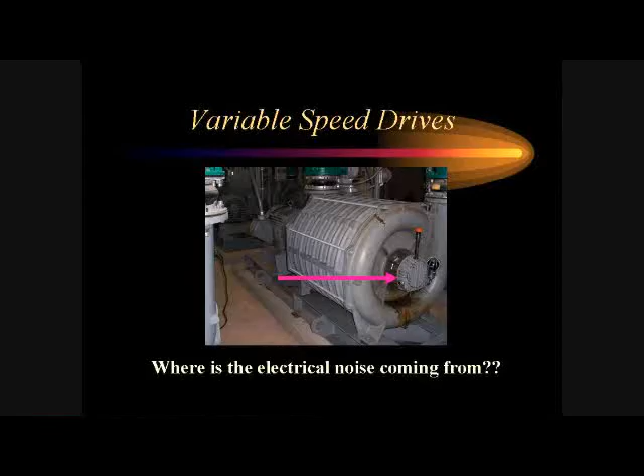What did we do? This is where we're hearing all the noise. Now, this is an electrical discharge. Why do we have electrical discharge on the outboard end of the pump when there's no electricity there? There's no electricity in the pump.

So I called them back and I said, 'What type of coupler does it have?' It had a Nordstrom coupler with the steel shims in it. So what's happening is our charge is going through the shaft, through the coupler, out through the pump, to the outboard bearing, which is the end, and it's finally dropping off and trying to go to ground there. So what we're going to do is they're going to take care of their vibration problem first.

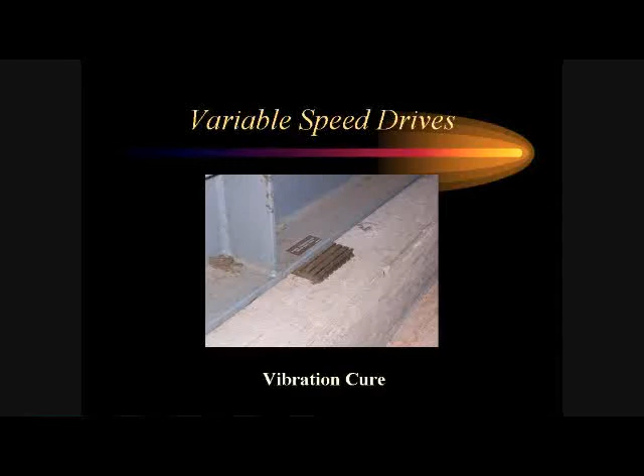They picked it up and put rubber pads under it, all the way around it. Look at this. Well, it quit shaking, but it's still not in alignment. They didn't solve the problem. And now what they've done, because the conduit does not have ground straps on it, they've isolated the total machine. There's no way it can go to ground. That's why it's cooking the bearing out on the end. So we tried to solve a problem, and we couldn't. What we did by trying to solve the shaking problem is we created another problem. So we've got to use the technologies together so that we don't create more problems than we're trying to solve. Listen to this machine.

I'm not going to play them all, there's quite a few of them. So we'll go to digester number 2. Let's play it in November of 2009.

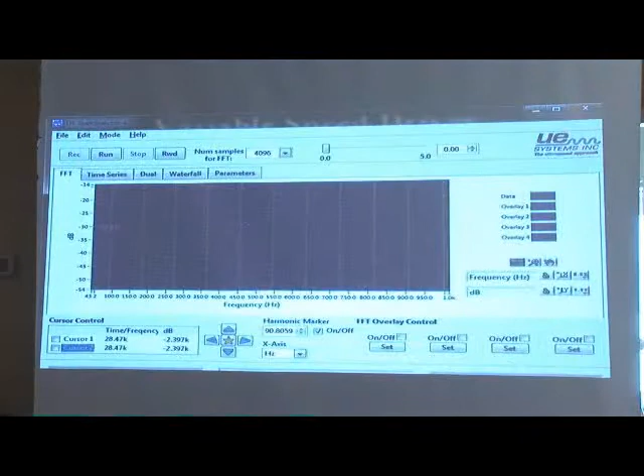That's on that outboard bearing. What's our harmonics there? Looks like we could have some. Let's play with this. Let's take it down, just keep going down. Or we can go right here and just highlight this and make it 60, because that's a pretty number. Bingo. Bingo. Electricity, huh? Electricity in the outboard bearing on the pump. That's all it can be. For that to happen to be that bearing and go right, we'd have to win the lottery twice to get that to come out exactly that way.

I will caution you though, what happens with a variable speed drive? What happens if that's a 6318 bearing and we go back to our little chart and bring it back up here. Remember that 1710 speed? What happens if we start dropping that down? Because remember, we're variable speed drive, okay? Well, if I drop that down, I'm going to throw it in there right quick because I'm about ready for a cup of coffee.

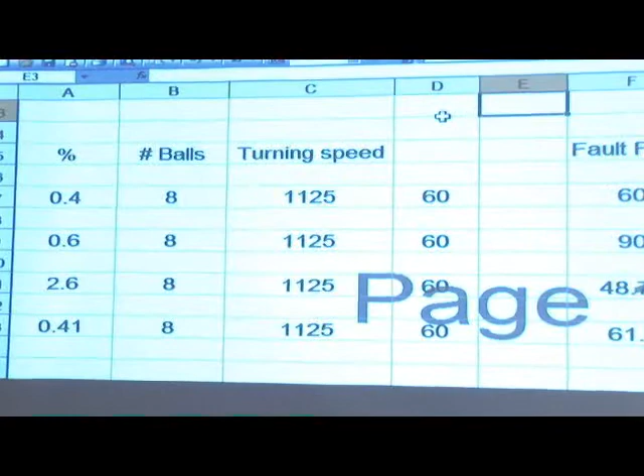Uh-oh. Uh-oh. Fault frequency on the outer race is 60. What was our harmonics? 60, right? What did it sound like, guys and gals? It sounded like electricity, didn't it? Then let's go with that. So sometimes you have to pay attention to what your ears are telling you. This thing could actually be running at 1125 RPMs, and if that's the case, we could make a mistake here, very easily. But I'm going to listen to what it's telling me. I'm going to look at the numbers and use that as a tool. My main indicator's right here. That's why I wear the headphones.

Yes, Joe? Just curious what type of drive was on there, Chuck. I have no idea, I haven't actually seen this machine.

One of my techs, it's actually for Boulder Waterworks in Boulder, Colorado. Because if it's got a 24-pulse IGBT drive on it, it should have a shaft ground to bleed off the shaft currents. And if it doesn't, it doesn't. Okay, thank you. And that's my next picture. Yes, I don't want to take away from your program, so don't.

Now, we're not going to if you don't turn the mic on. Just going to say that the VSD, most of them these days will have a dial gauge somewhere where you can see pretty easily what the speed is running at. So if you want to be sure and you're not sure, another thing to do is just go look at that VSD. It should be able to tell you, okay, the speed might vary a little bit, as you've already said, but it's going to be pretty close. Yeah, and that's another indicator. Now, I wasn't able to do that because I literally got these sound bites and these pictures 2 days before I came down here. So that's why they're on the end of the program.

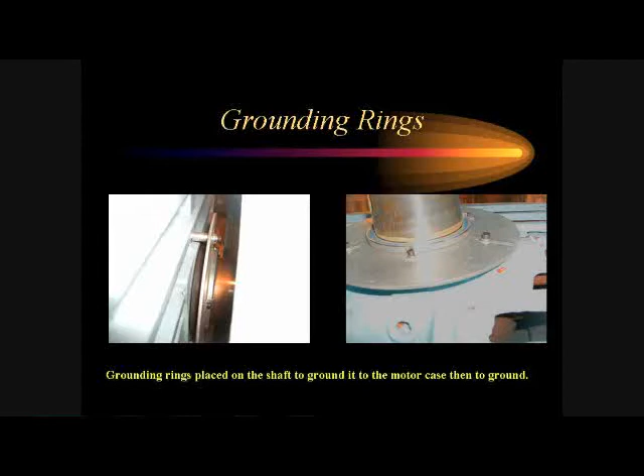So let's move away from that, and I'm going to show you one of the things that they've done. This is a grounding ring. Now, I'm not saying this is the proper fix, I'm saying this is a fix. What happens is that steel brush right here clamps down over that shaft, and then that thing is bolted to the motor case. So what it does is it grounds your rotor to your motor case. Then your motor case should be grounded. Anytime you have a 100 horsepower motor or more, National Electrical Code in the United States says it's got to have a direct ground. Well, obviously that wasn't the case here, because we isolated it with rubber pads because we had a vibration problem. So now we're taking care of our vibration problem, we're not going to eat our bearings up, but we're going to cook them with electricity. So we created a problem. So with that in mind, if I can find the rest of my equipment.

On top over there. Ah, here it is.

With that in mind, there's just a couple of things I'd like to close with. The first thing is, please listen to your equipment, because you're going to hear things you're not used to hearing. If I hear something I haven't heard before, my first question is: what is that? Why is it doing that? What causes it to do that?

I have to ask those questions. I need to know, because it could make the difference of shutting down a $285,000 a day plant or not. I don't want to take that liability. I'm in business to make these predictions, and I have to be spot on right. If there's any question about it at all—you asked a while ago about the bearing—if it doesn't quiet down, write it up. I'm going to put a flag on it and say this thing doesn't sound right.